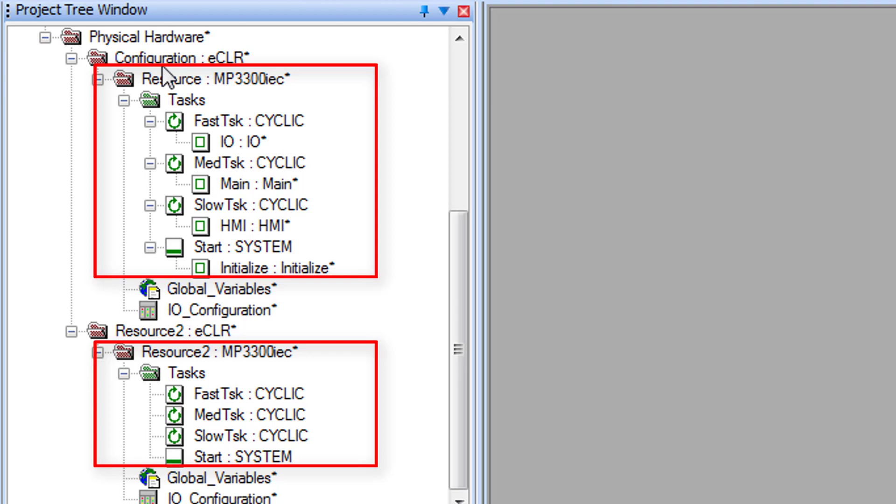A multi-resource project means one project can contain multiple controllers. This benefits applications with a large number of servo axes and more than one controller. There's just one single project to manage and a single download point for all controllers. Additionally, data can be shared between controllers using network variables. Now let's look at this in more detail.

The term resource refers to the controller in an IEC 61131-3 project. Traditionally, you create a separate project for each controller, but in MotionWorks IEC version 3.2 and later, we have support for multi-resource projects. This means multiple controllers in the hardware configuration and multiple controllers in the programming environment.

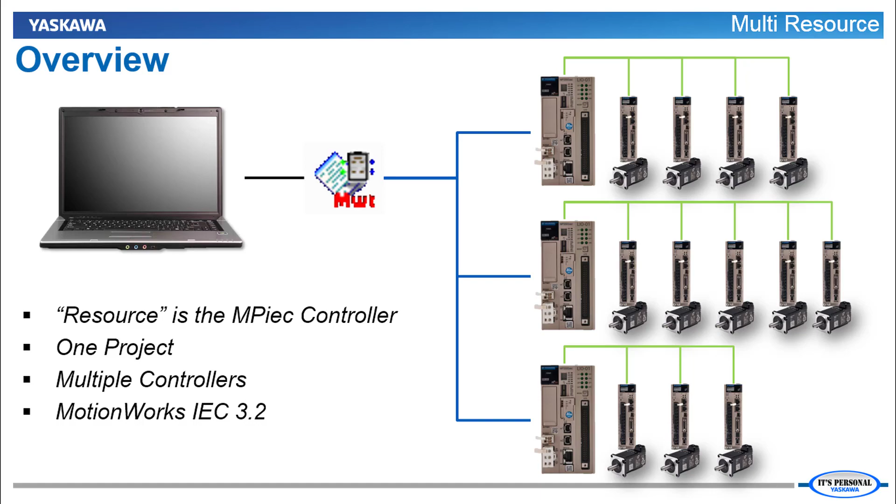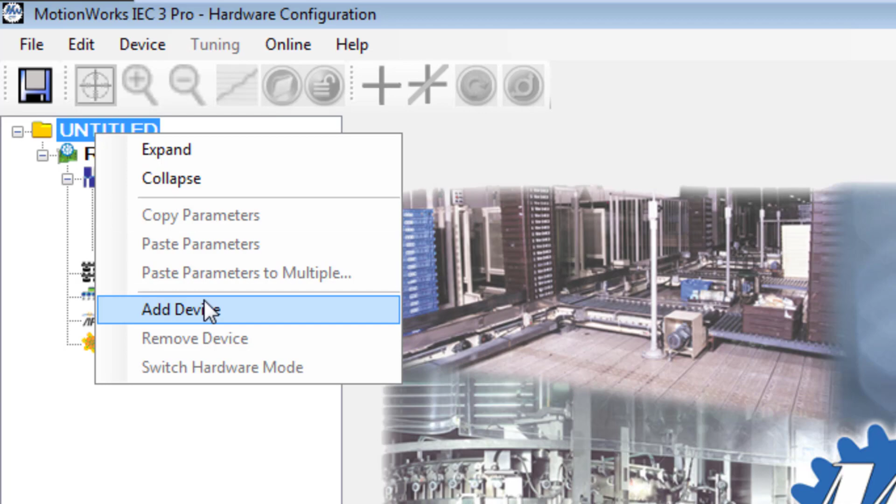Now I'd like to demonstrate some of these multi-resource features, and I'm using version 3.3. Here I have a new project for a single MP3300 IEC controller. And let's say I want to add another MP3300 IEC controller to this project. In the hardware configuration, at the project level, I'll right-click to add a device and choose this controller.

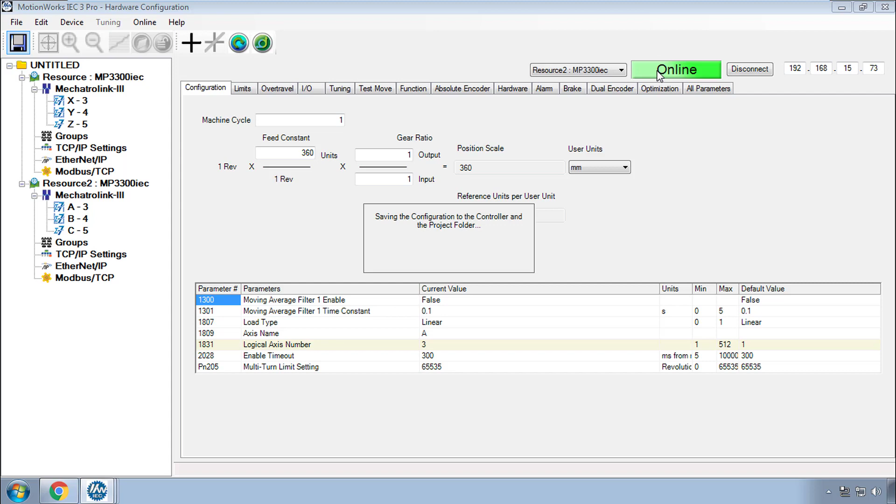Online and offline works the same, but you individually select the controller for online. You would adjust the configuration for each controller and each axis as usual. When you save, that updates the offline files for all the controllers and sends the configuration to just the connected online controller. You reboot each controller individually as required.

Now, the physical hardware tree also shows both controllers. You can copy a task from one controller to the other, or even move an entire task. The same goes for the program instances. You can copy the program instance, paste it in a task of another controller.

Any libraries and custom data types are available to both controllers, and all updates to these libraries and data types will apply to both controllers as well. It's really a convenient, organized, and centralized way to program a machine with multiple controllers.

Some thoughtful planning is required if a program from one controller will be used in another controller. And this is because programs often use global variables. Notice that each controller has its own global variables worksheet. Global variables for axes, data, and I/O apply to a single resource and are not shared between controllers.

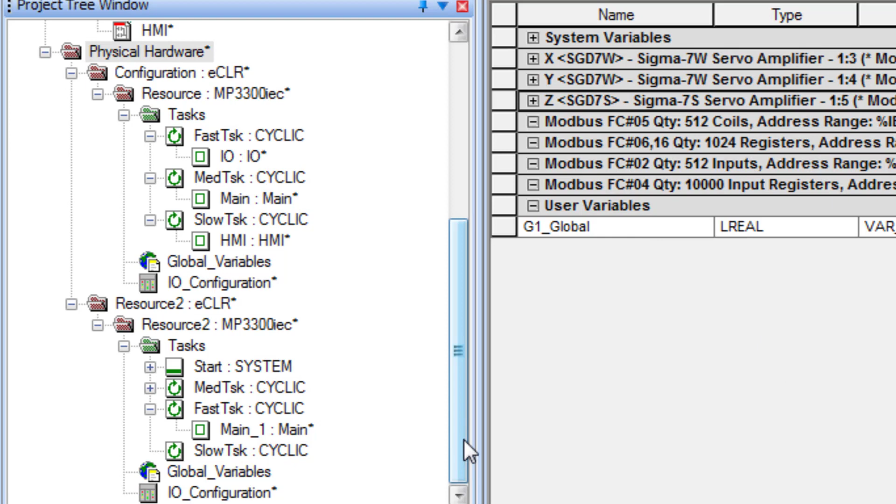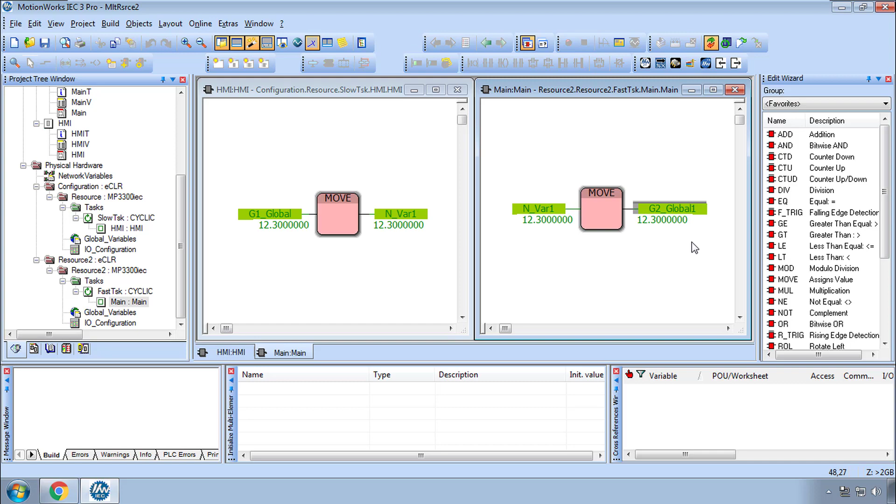How then do you share data between controllers? One option is to use network variables. And these can be created in the usual ways. Here I have a task in the first controller writing to the network variable, and in the second controller it is reading the network variable. I'll change the data in the first controller, and it updates in the second.

Be aware that network variables don't have a deterministic update rate and are not recommended for time-sensitive data. For transfer of time-sensitive data between controllers, it's best to configure each controller for EtherNet/IP and write code to transfer critical data at a faster rate.

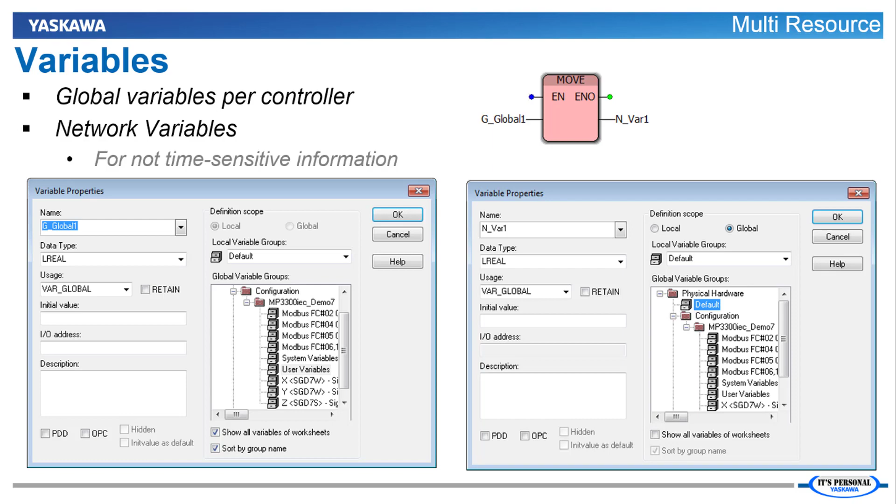When you've done your programming, Make compiles the code for all the controllers in the project, and the project control dialog shows each controller. You can connect to the controllers together, stop, and download, and warm start together. Or you can do this individually with the standard control dialog.

So I hope you see how the multi-resource capability of MotionWorks IEC 3 provides central management of very large projects that require more than one controller.